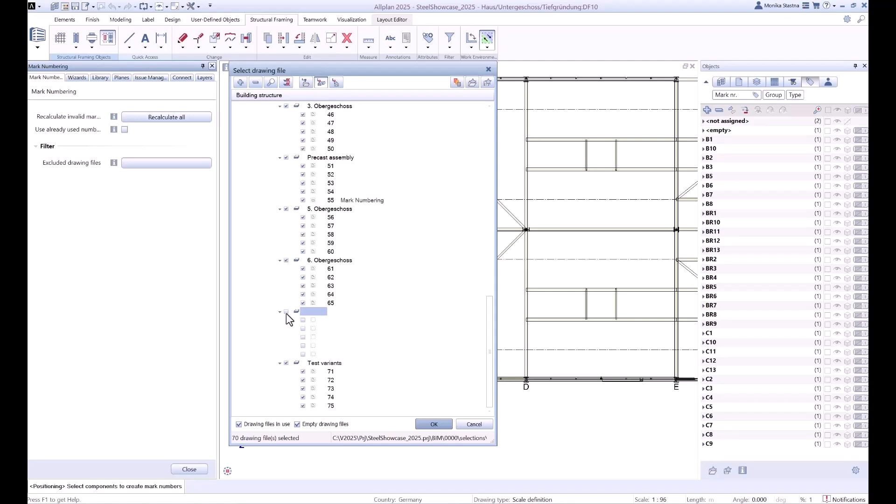As a first improvement, I would like to introduce the possibility that now we can exclude the drawing files which should not be considered for the recalculation of the mark numbering or for the creation of new mark numbers. Already existing mark numbers in these drawing files will be ignored. If you decide later to recalculate these drawing files again, you activate them and they will be considered again.

The next new property is the possibility to use again a mark number which was used before but currently is not used. So, for example, I would like to generate the new mark number for this object. When the check is not on, I generate the mark number.

On the next object a new free mark number was set, so now there is a B11. But I would like to use mark number B4, because we can see that mark number B4 doesn't exist. So we set an undo step and generate the mark number again. Now I activate this possibility and generate the mark number, and we can see in the object palette that the free mark number was used.

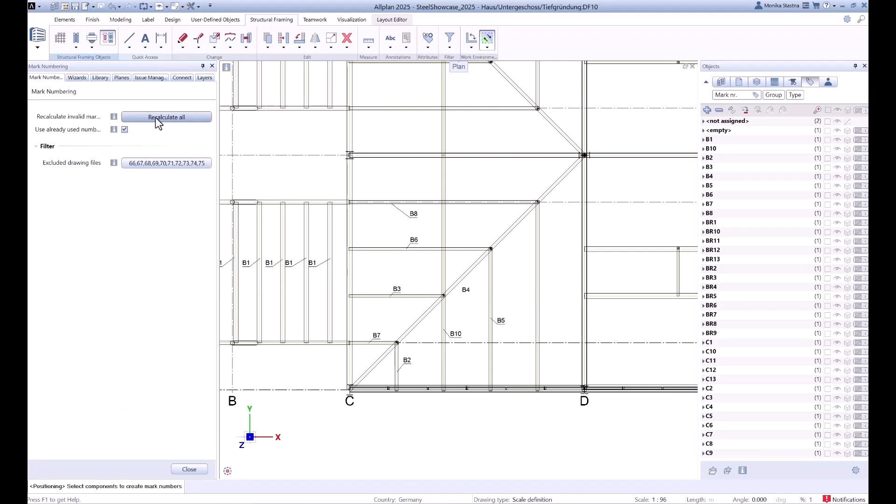Then there is a possibility that now we can recalculate all drawing files through the whole project if there are some incorrect mark numbers. For example, I change this object, changing attributes which should be considered for the recalculation of the mark number, for example material. I set a new material, so then we will see information about an incorrect mark number in the notification center. I start the palette for the mark numbering and click on recalculation, so now the recalculation is done through the whole project. After confirmation, you can see that now there is a correct mark number.

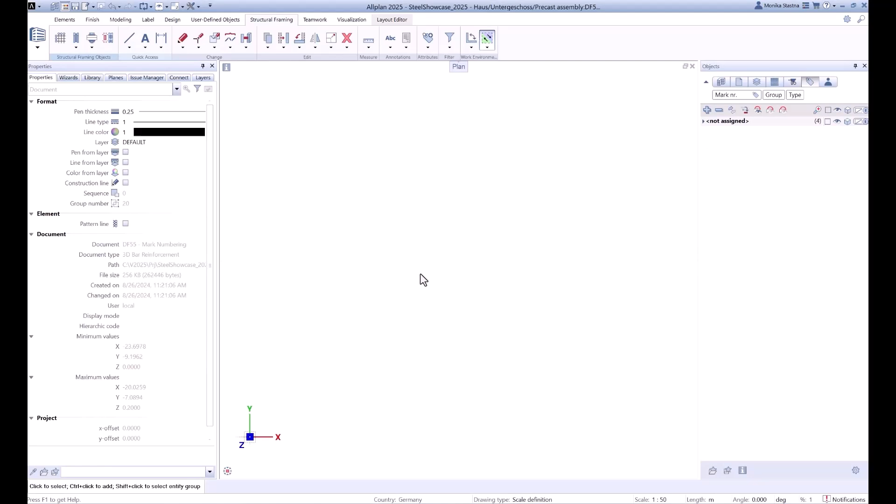Then the new functionality of the mark number is used since version 2025 also for the precast objects. So here is a simple example. I select the precast object, I define a schema for this object, so for example I set A1.

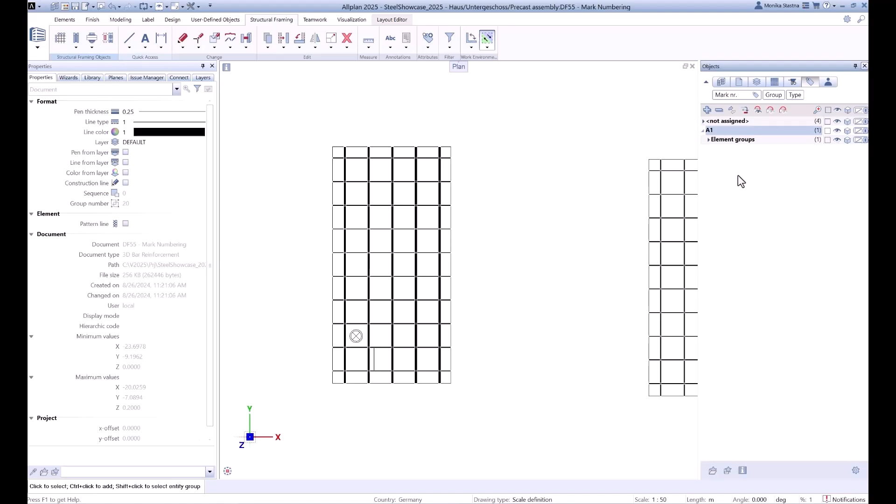Now I start the recalculation, and we can see in the object palette that the new mark number for the precast objects was set, but we can check it also directly in the palette for the precast objects. So here we can see that the new mark number for the precast object was set.

Okay, so that's all from my side. Back to you, Tim.

Okay, thank you, Monika. Good to see that improvements on mark numbering have been implemented in the latest version of Allplan, but I'm sure you have further improvements to the mark numbering function in the pipeline. Therefore, I would like to know which future developments our users can expect.

Our customers can expect extended functionality because the development is still in progress and we are still adding new features. Later, it could be applied to any type of objects in Allplan.

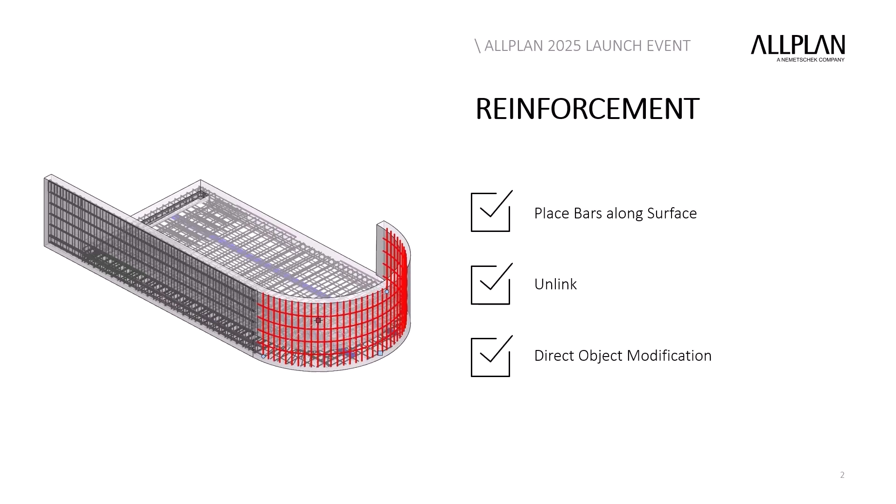Our example is a complex balcony with the new functionality Place Bars Along Surface. It is extremely easy to reinforce a selected area. After the creation, the user is directly able to modify the concrete cover or some of the other placement opportunities. Via the property window, the user can afterwards adjust the reinforcement based on new requirements.

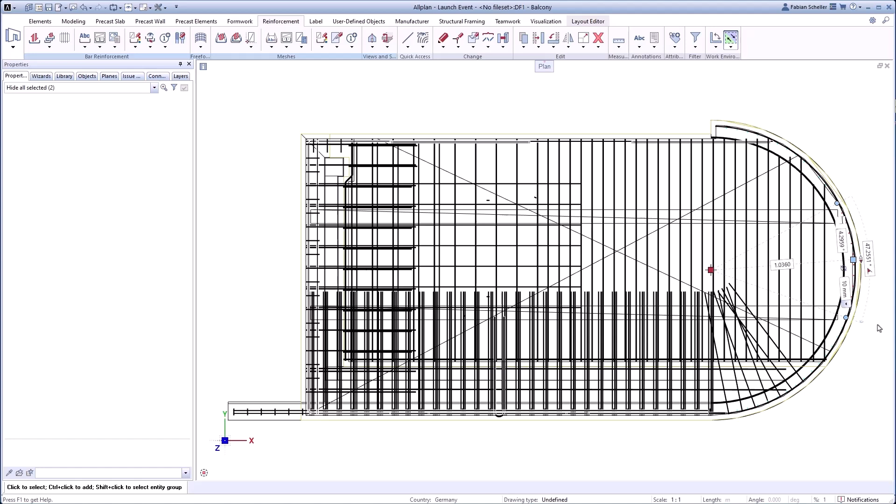If the required changes are not part of the property of the surface reinforcement, the user can unlink the reinforcement and adjust it with the existing functionalities. For example, he can change parts of the placement via direct object modification. This is really intuitive and speeds up the work. With these extensions, complex shapes can be easily reinforced.

My next topic is the improvements of fixtures. In 24, we started to improve the handling of fixtures and already received a lot of positive feedback. In 25, we finalized the work and implemented the placement of fixtures along surface, direct object modification to make adjustments on the placement intuitive and faster, and we added the possibility to create dimension points for associative dimension lines to increase the performance and the handling.

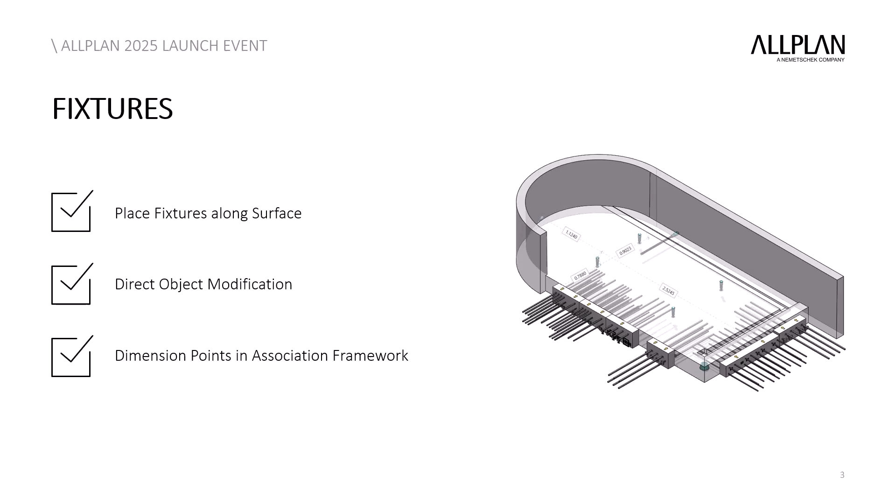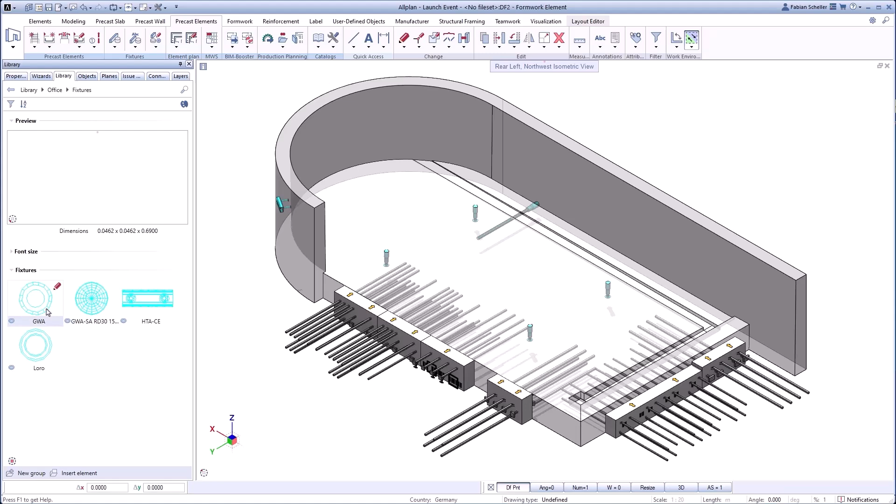With just one click, the fixture is transformed into the correct position based on any reference surface. The handling with handles is extremely intuitive and efficient for modification. Fixtures can be placed in a model or in a view or a section. We also introduced the local coordinate system for fixtures to explain to the user the transformation on the reference surface.

This example shows the benefits of unified navigation, because from now on users can directly rotate the element without using a separate mode.

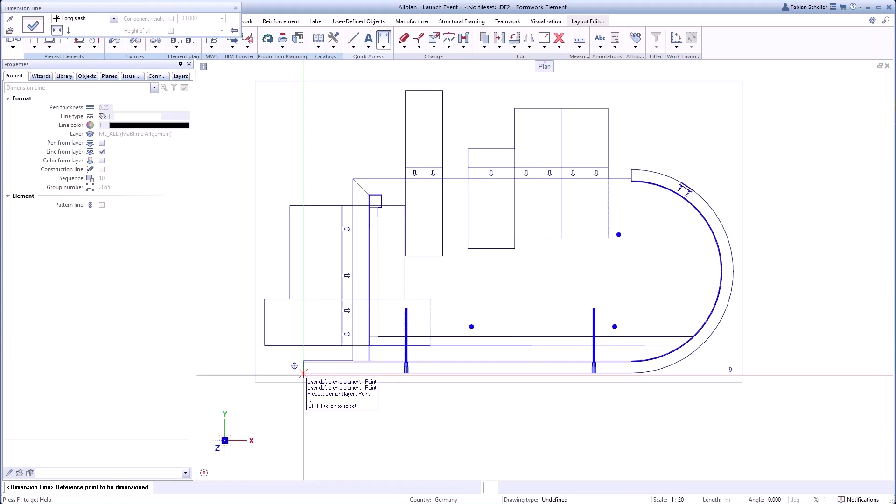The next thing I would like to point out are the performance improvements of user-defined associative dimension points. Inside the definition of a fixture, the user is able to define his own custom dimension points. If they are available, the program does not need to calculate all existing edges of the fixtures—it will directly offer the predefined points. This makes it much more efficient to select the right points for dimensioning an object.

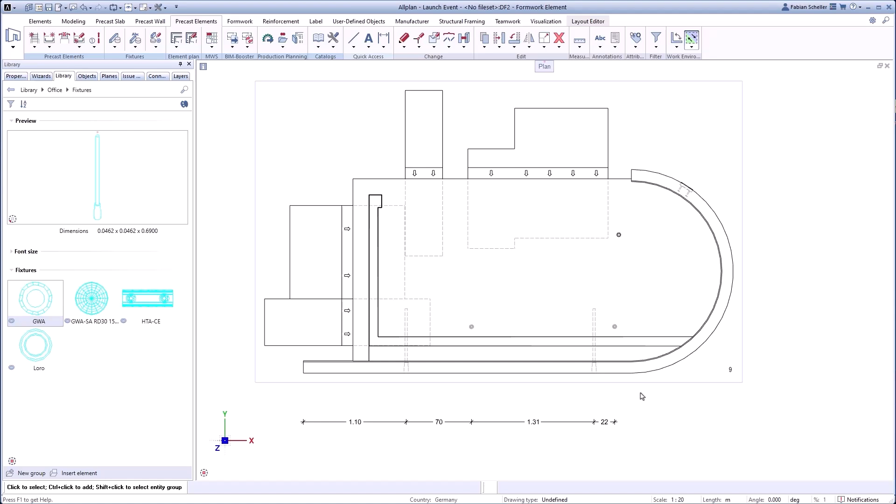Let's speak about our new module, Freeform Formwork, inside of Allplan Ultimate. With this solution, it is absolutely easy to create the formwork of balconies, spiral staircases, or unique prefab infra objects.

I will show you how to assign formwork boards along any surface, create a substructure with an automatic juggling of the formwork boards, and the optimized export of formwork boards for a CNC machine.

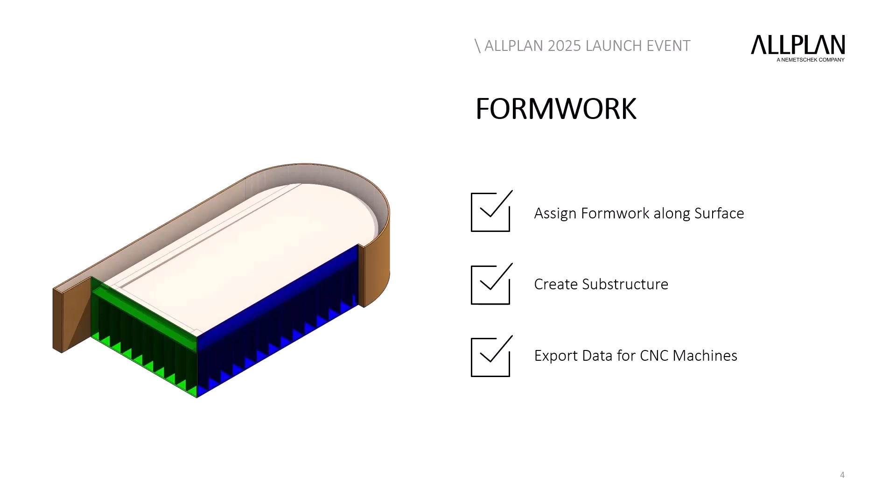The first step is to assign formwork boards of existing surfaces under consideration of the neighbor board. That means the first selection of an area is mandatory for the area of the second selected board. In this example, the front sides are overlapping the predefined existing boards.

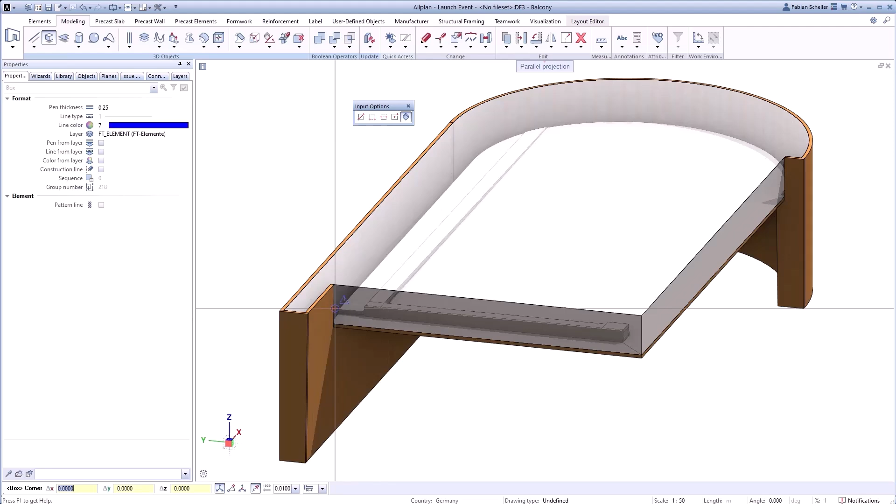In the next step, I will create a substructure based on a 3D geometry. In this example, I used a 3D modeling area to create a simple box. Here we can also see the new point recognition of the cursor.

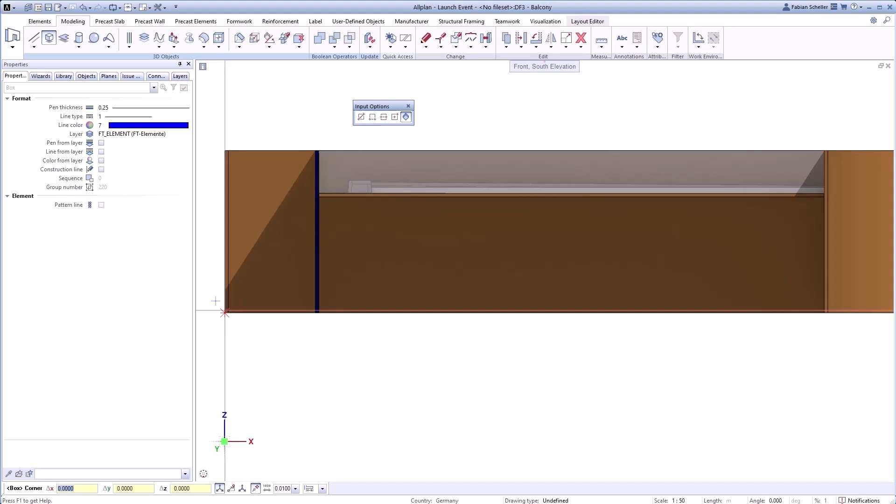The user will be informed with a rectangle that he needs to have a more precise look on the situation to pick the right point. This avoids mistakes or wrong selection of points in difficult situations.

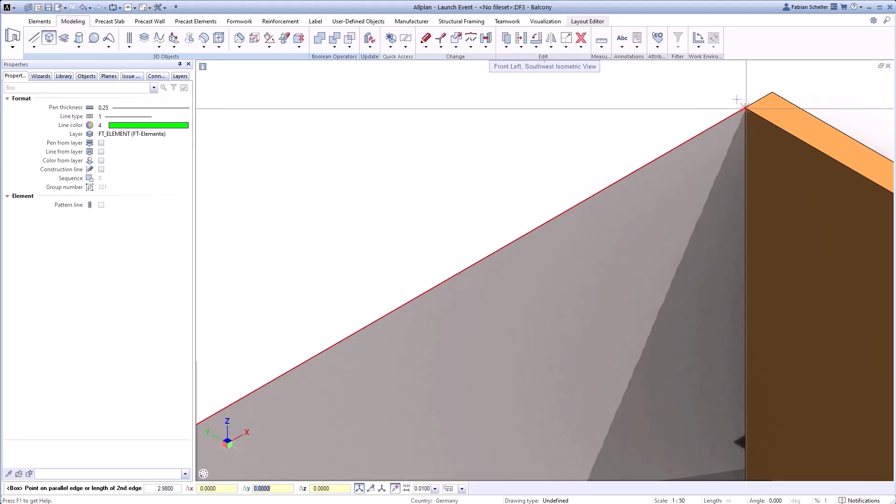To distinguish between horizontal and vertical boards, I used two different colors. The possibility to overtake any 3D component into a formwork board and the transformation back of single shuttering boards allows us to find a solution for every situation.

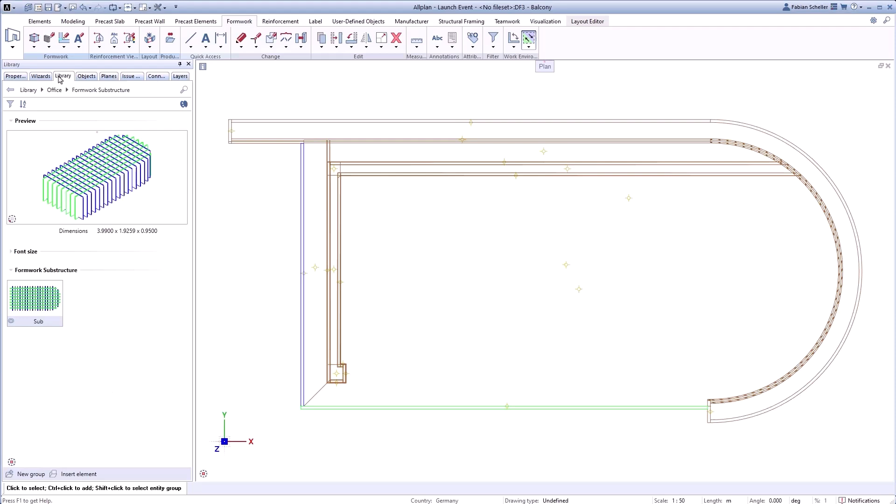In the next step, the 3D components are transferred into a formwork substructure. To speed up the situation, I used some predefined boards for the rest of the solution. But you can also copy or adjust the boards via point modification to your personal needs.

Next, you will see how to create a juggling between the formwork boards. The first decision of the juggling is to select a basic element—in this example, the vertical boards—and then the horizontal boards to create the juggling. Now it's time for the intersection of the substructure with the rest of the existing formwork and the model itself.

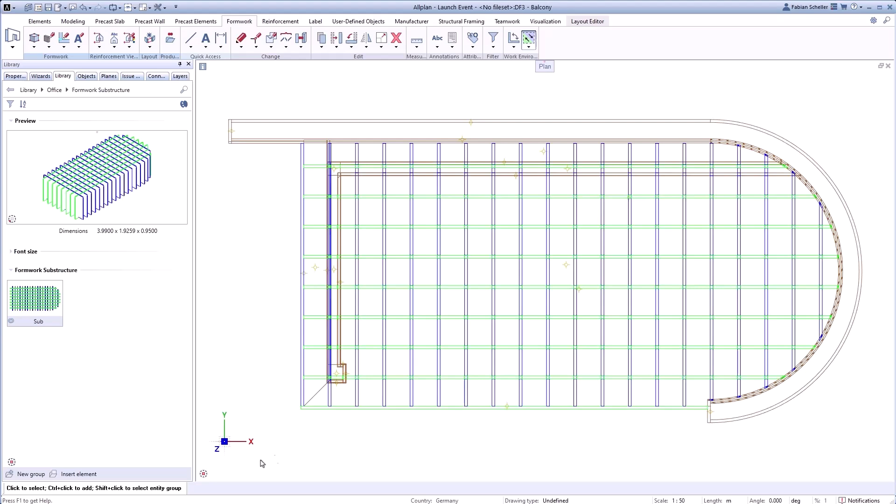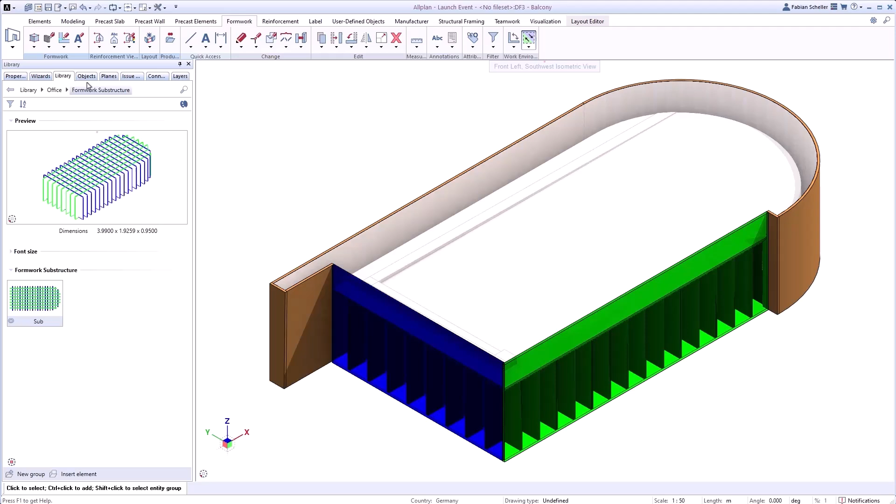The next step is to create an explosion view of the attached formwork boards without the substructure. Using the object tree, manual shuttering boards can be easily switched off, and the rest of the elements can be selected via area selection.

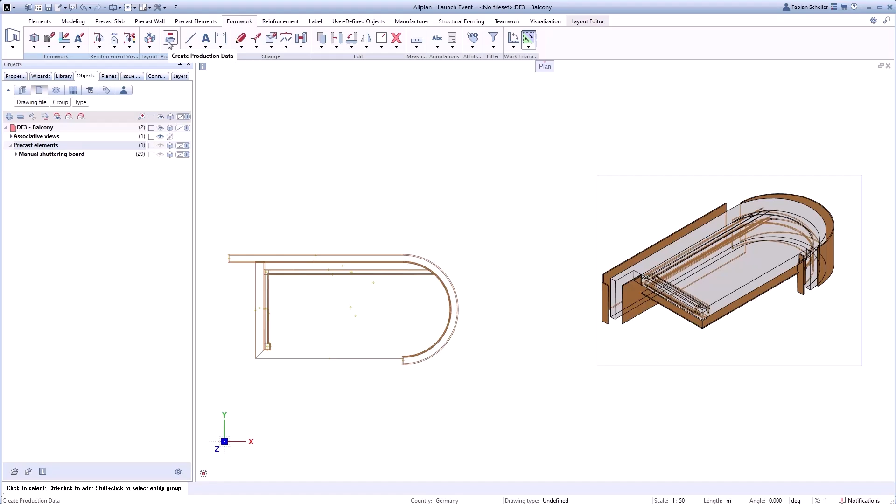The last step is the export of the data for a CNC machine. In my case, I create all boards in the drawing file via a batch export to make the export visible for us: first for all attached boards, and second for the complete substructure. Regardless of the machine supplier, the data is prepared and optimized for automated processing.

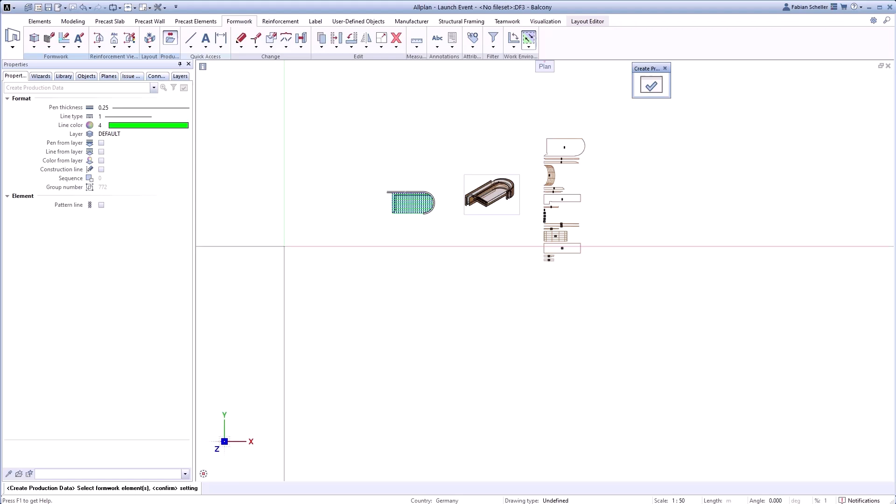Thank you, Fabian. I'm really impressed by the ease and efficiency with which engineers can create arbitrarily complex formwork boards based on any shape.

To close out the session, can you give us an insight into the further planning? What can Allplan users look forward to?

Of course. The topic of sustainability and the associative openness to multi-material is a clear focus for our future development. Performance and usability improvements are also at the top of our agenda for the next releases. The merge of Allplan, Frilo and Scia provides us a large opportunity for unique automatisms in the planning process of the future, so our users can look forward to a variety of exciting features.

Indeed, very exciting times to be a user of Allplan. I think they're really looking forward to a lot of new solutions that they will face in the future. Thanks again for your contribution to today's event, and take care, Fabian.

Our next speaker at the Allplan 2025 launch event is Klaus. As the product manager for Precast at Allplan, Klaus brings a wealth of experience to the table. With a background in civil engineering, he spent 10 years working in an engineering office and another 8 years in a precast plant. Since joining Allplan, Klaus has applied his extensive knowledge first in support, and since 2022 as a product owner in product management.

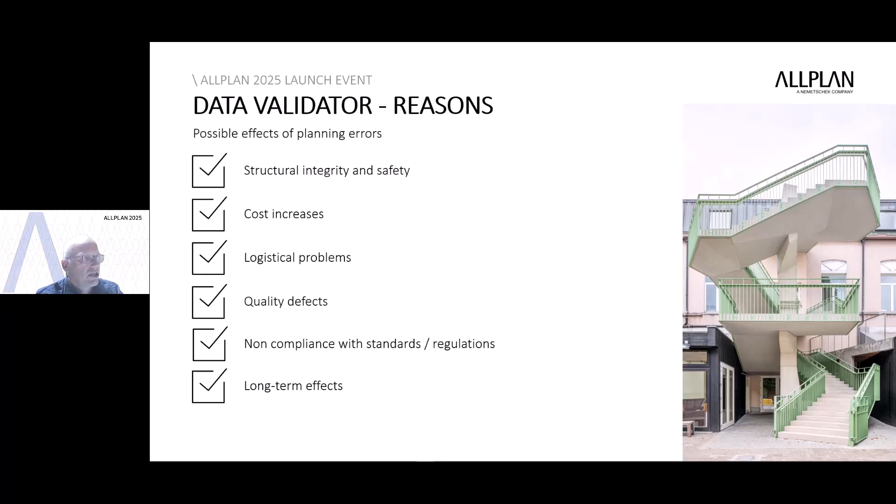Now let's have a look how our Precast Data Validator can support you during the planning process. The data validator offers the ability to create additional checks during the planning process. These checks are completely free configurable up to your needs. All of these checks help avoiding planning errors, complaints from your customers, and even accidents in worst case. The results of these checks vary from information only up to prevent the data creation. All of these things ensure the planning quality and avoid costs.

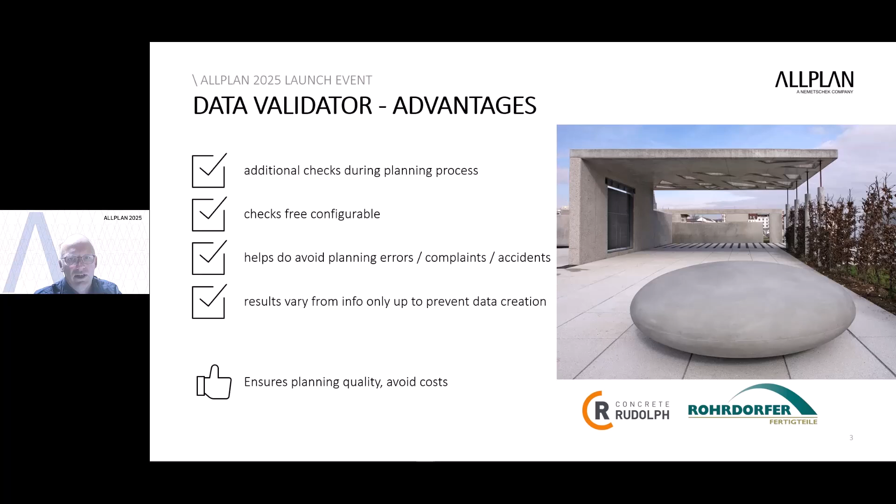A closer look at the functionalities.

So far to this. Now let's jump to the program and have a look at the new functionalities in Allplan itself.

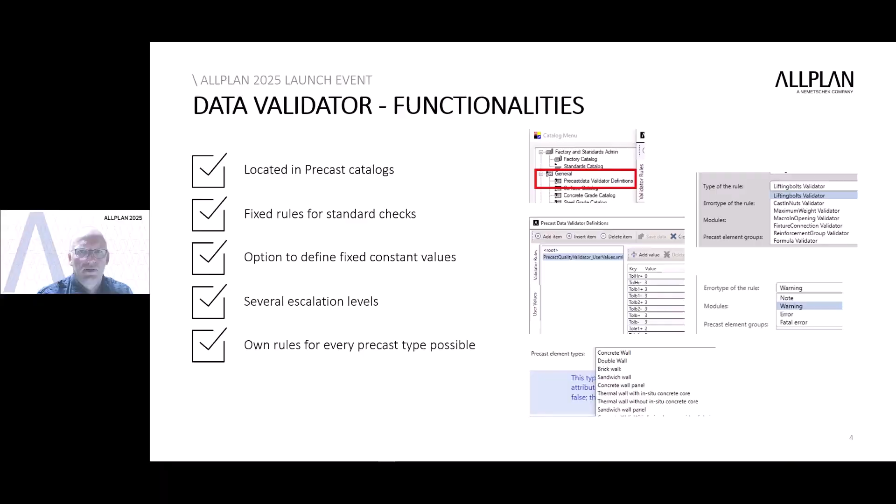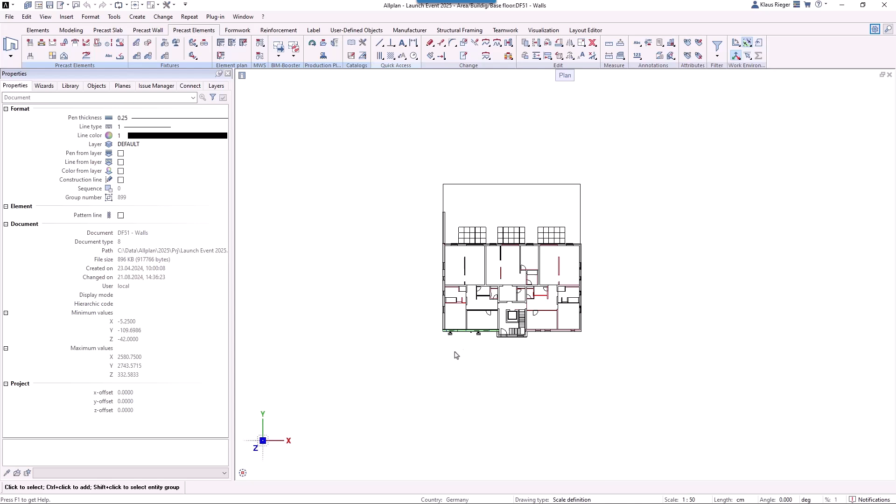So I prepared this little house here, and inside I created two precast walls. Let's separate the walls here. And you see, if you have a closer look, both of them are 2.60 meters in height. The left one is the smaller one, which has a weight of 2.3 tons, and the right one has a weight of 6.4 tons. In addition to this, I created some checks in the precast data validator.

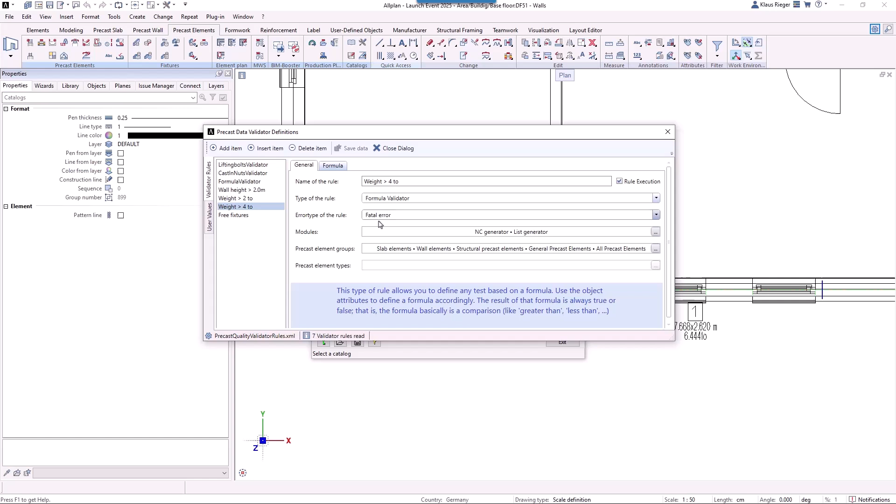One check gives a warning if the wall height exceeds 2 meters, which is valid for both of these walls. And I created two checks: one checks if the weight is greater than 2 tons, which gives only a note. And the second check, if the weight exceeds 4 tons, then it's a fatal error, and this fatal error prevents the creation of data.

Now let's try to create the lists for these walls. If I start a list generator for both walls, you see I get a message from the data validator, and at first you have a fatal error, data processing stops now, and the data is not created.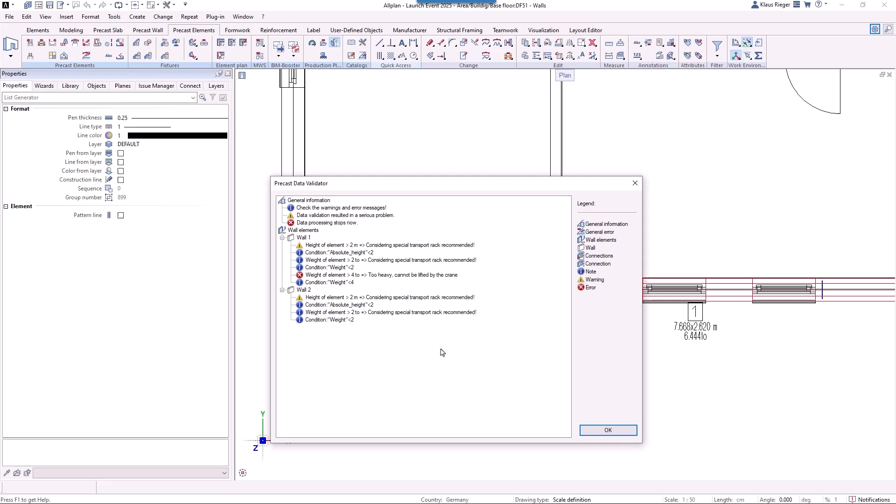And if you have a closer look at the details, you see for wall number 1, which is the bigger one, the weight exceeds 4 tons, too heavy, cannot be lifted by the crane. For the other wall, you see it's only a warning that the wall height is above 2 meters and the weight exceeds 2 tons, and the program gives you the special messages for this.

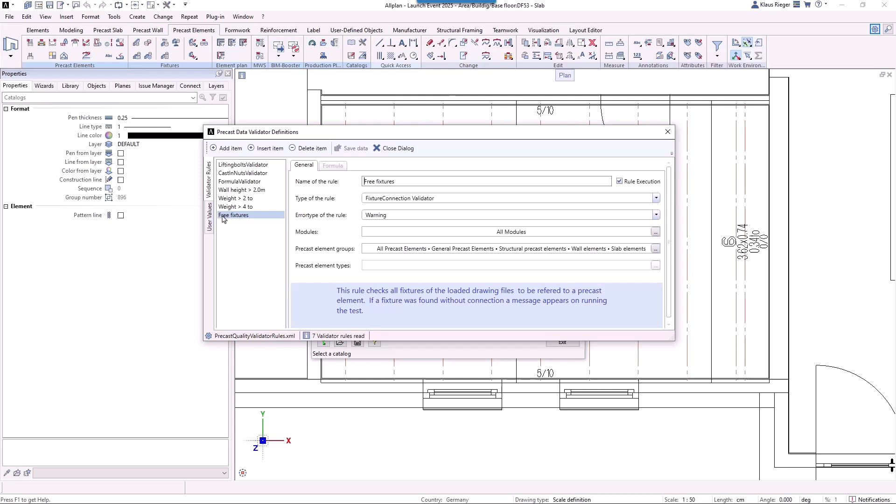I also prepared a second check. I created 2 slabs here, and in these slabs we have some fixtures. And if we look at our data validator rules, I created a rule which controls if there are free fixtures on the drawing file.

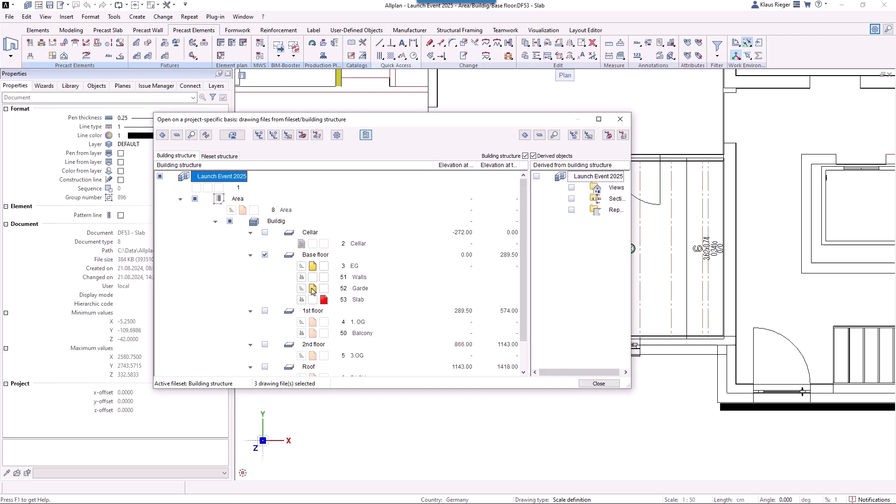If I start the list generator again for these slabs now, you see I get a message that one fixture is not connected to a precast element, which maybe is an error. If we have a closer look why, it's very fast clear that by mistake I created this second fixture on the wrong drawing file. That's the reason why it's not connected to the precast elements.

I think it has already become clear from these small examples that the new functionality is an important building block to support the draftsman in achieving the highest possible planning quality. And now, back to you, Kelsey.